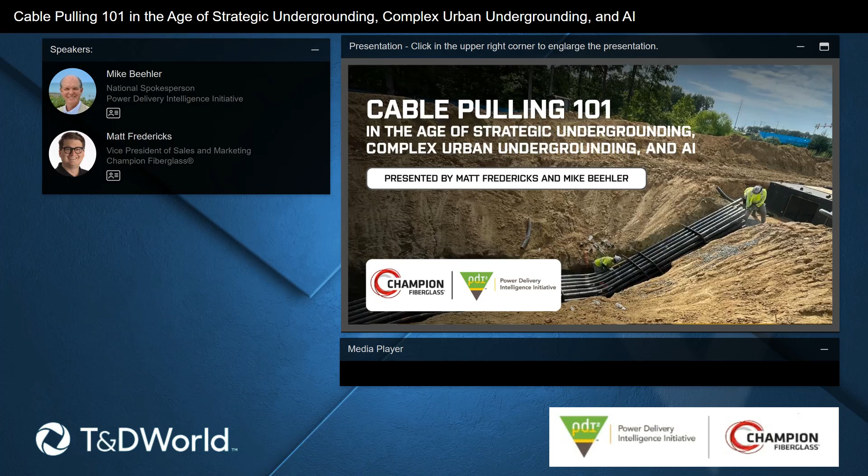So I'll just tell you briefly that the Power Delivery Intelligence Initiative is a group of contractors and consultants and fabricators and cable manufacturers and equipment manufacturers that advocate for underground. We want to be a resource for planners and engineers, and today, even data scientists, to help evaluate the total cost of ownership of overhead versus underground electric distribution and transmission over the life of the asset. So what's it really cost to have an overhead versus an underground system over the life of the asset?

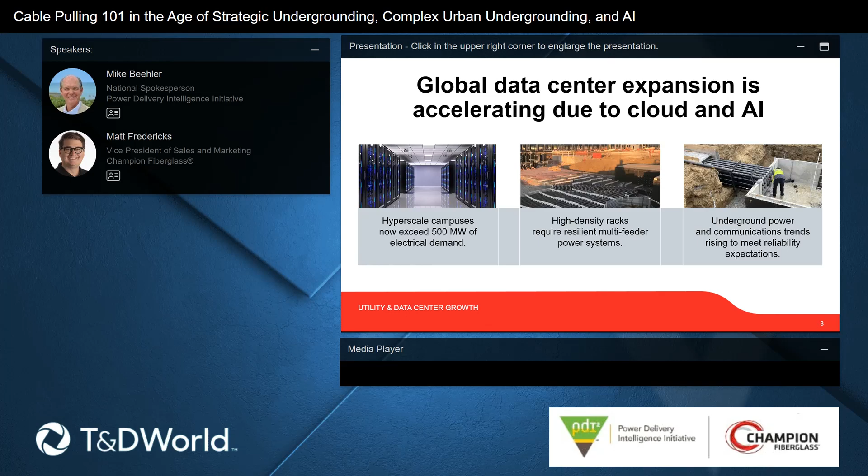It's a fabulous and great tool to use. I use ChatGPT for email drafts, proofreading, multiple different things. One little tidbit that I'll share, just in case most of you don't know this: one ChatGPT search uses as much power as charging your iPhone from 0 to 100%. So the amount of energy that ChatGPT and other AI programs use is very, very immense. So that translates into electrical load growth.

So what does that really mean? Hey Matt, let me ask you a question real quick. Yeah. So I look at these duct banks that you're showing in that previous picture, and they're massive. I mean, what about the heat buildup? I'm going to bet that you're going to talk about heat dissipation with fiberglass, but these are really, really massive duct banks with dozens and dozens of ducts. What's going on? Yeah. Well, this, as you know, Mike, being an electrical engineer, creates a very interesting problem for

the project owners and the engineers, as well as the contractors dealing with these large buildings. So you're dealing with cables that are running really hot because they're trying to get the maximum amount of amperage out of the cable to run these data centers as powerfully as possible. So what does that mean? Well, there's a lot of research going into concrete right now. If the duct banks need to be concrete encased, a lot of folks use what's called red dye concrete, which is highly compact concrete that allows the heat to dissipate faster rather than regular concrete slurry, native soil, sand, other

things of that nature. That concrete is anywhere from 3 to 5 times more expensive a yard than regular slurry. So it makes things a lot more expensive. So folks are looking at different conduit materials as well as a multitude of other products to try and defray that cost. Good, interesting. Thank you.

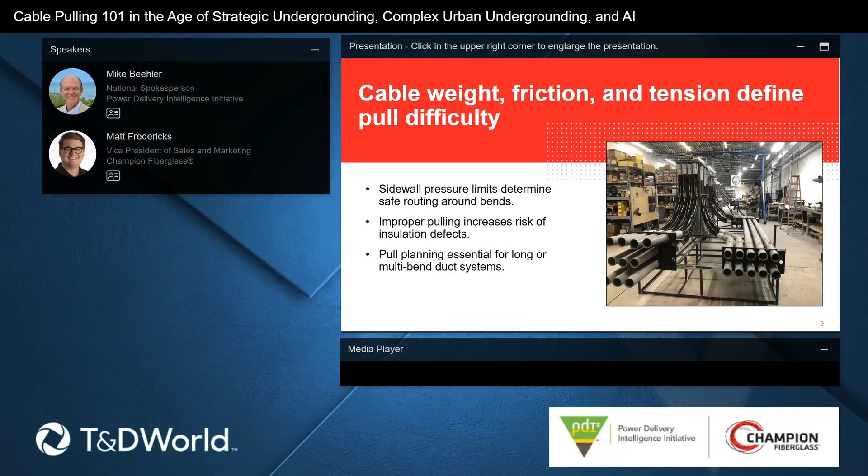I will say, just want to hit this home on this slide. Improper pulling increases risk of insulation defects. A lot of people will talk about, hey, we have this puller that'll pull 12,000 pounds, 15,000 pounds, and the cable made it out the other side. Well, just because a cable made it out the other side doesn't necessarily mean that it wasn't damaged in the process. That's why that pull planning matters so much. So things that we can do to help, and these are just a couple things. It's not comprehensive. This may seem kind of elementary or odd to people that I'm going to talk about a swivel, but Mike, I'm sure you've probably been on many plant audits.

You see how cable is made, and it's in a rifled pattern. Cable, rope, many things like that have a natural lay to them, which means that when they're being pulled, they're rifling out. They have a direction to them, if you will. So the reason why we use swivels is it prevents that rotation from happening when you're pulling it. And that's the same with the rope too. It has a natural lay or rifling to it. So you want to keep it from twisting under load as much as possible. That will vastly reduce the amount of torque on the cable when you're pulling.

So there's tons of different types of swivels. There's sealed ones. There's even ones that you can purchase from our partner at PDi² that have what's called a breakaway swivel, with a pin that will actually break if you exceed a maximum amount of allowable tension. So when that pin breaks and comes out the other side, you'll know it's exceeded that tension. If the pin isn't broken, it hasn't exceeded that maximum tension. So that's more elementary.

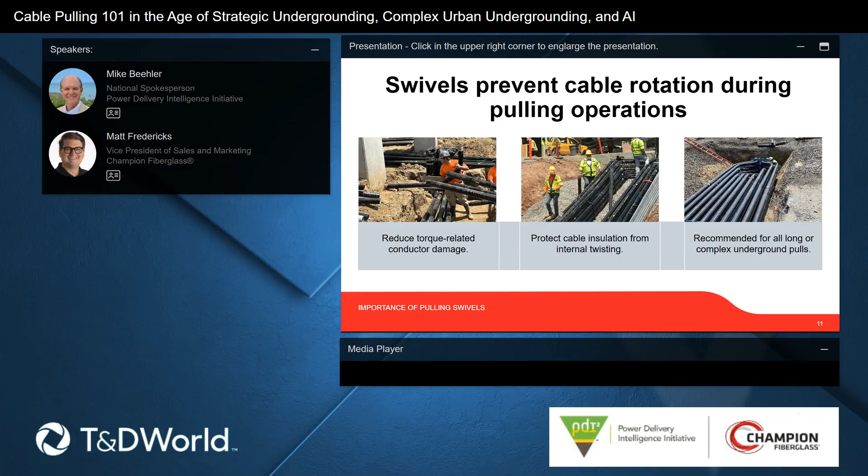So another one that folks might giggle at, but I will tell you it's so important, is pulling rope. People oftentimes balk at a pulling rope that in their mind might be more expensive than another. But getting a high quality pulling rope, or even a high quality braided anti-twist aircraft cable on a diesel underground puller, all of that matters so much, because you don't want that rope to stretch over time. If it's a low stretch rope, it'll keep consistent tension on that cable or conductor. If it's stretching, it might snap or break, or you might have galloping or jamming.

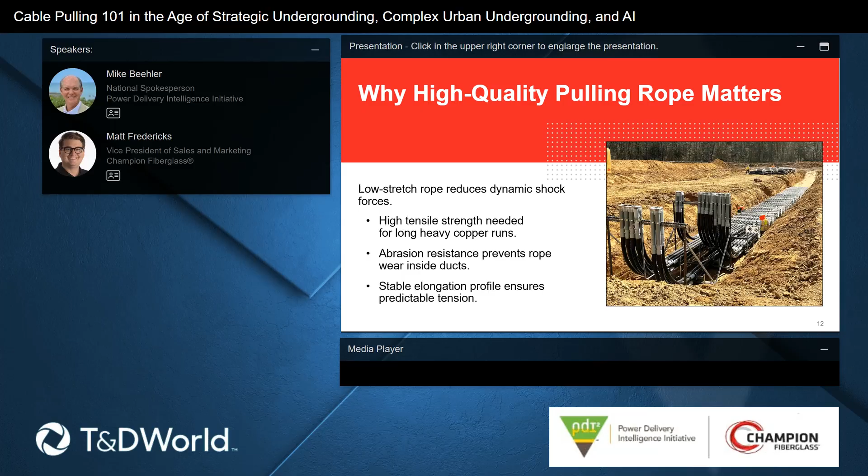And then also you want it to be smooth on the inside of the duct. I talk about this all the time with mandrelling. I've never understood why an engineer would specify a wire brush mandrel. I'd love to hear in the comments why folks still love those wire brush mandrels. I want that conduit to be as smooth as possible on the inside. So having a rope that's nice and slick, and there are tons of manufacturers that make them, is so fabulous to have in your conduit, because it's not going to abrade the inside of the conduit.

All right. Another thing that I love to harp on, and this is really interesting. I was fascinated, Mike. One time, I won't name what cable manufacturer, but there's a lot of utilities that specify a specific brand, and I looked in their manual, and they actually disallow pulling grips at a certain tension, and that's because those grips actually pull on the outside of the cable, on the jacketing, rather than pulling on the conductor. Right. And if you've ever been on a cable pull and the cable comes out the other end after you've used a cable grip and it's under really high tension, sometimes that jacketing and even the insulation will be far ahead of where the conductor starts, which means you've really done a number on the insulation and the jacketing.

So why would you use a pulling eye? Well, if you use a pulling eye, it's pulling on the strongest part of the cable, which is the conductor. There are crimp-on ones. There's reusable power pulling eyes. There's tons of different types of pulling eyes.

And what's awesome is most cable manufacturers will put them on for you at the factory, and critically, they will stagger them, almost like a multiple pulling harness, because you want one conductor after another coming through that sweep in a system, rather than having all of them bunched up and potentially jam inside of that sweep. So that's my mild amount of pontification on why you should use pulling eyes in that instance.

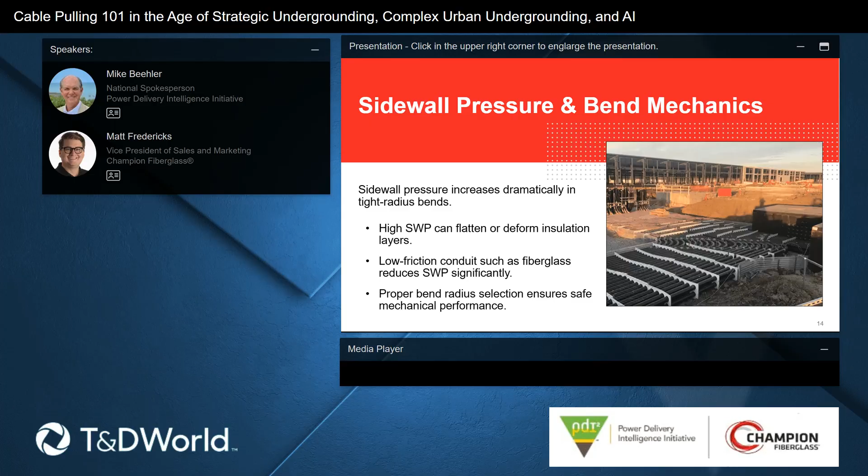We're so lucky now that we're beyond running line tensiometers or amp draw tensiometers on cable pullers. Now we have real-time data every second, pulling cable tensions down to, I believe, tens of pounds that can be recorded. Limits can be set on cable pullers so the pulling tension isn't exceeded. There are so many safeguards now that we have. But again, that's predicated on using the right type of tools.

So, hey, Matt, I'm just glancing at the questions from the audience, and your comment about a wire brush being used for mandreling got some reaction. Oh yeah, I would love to hear about this. Yes. So you've got an alternative to a wire brush that you like to recommend?

Gosh, I would say for cleaning out ducts, even using a slug style mandrel with PVC or HDPE discs, which are a little bit softer, is better than a wire brush mandrel. And a slug like that is really going to take out most of the debris. You can also use a rubber swab or a rubber slug as well.

I remember the first time I was at an underground training school put on by a manufacturer I used to rep, who makes cable pullers, and we saw a wire brush mandrel go through a PVC duct system, and there were just little furls or curls of PVC everywhere. It's like, well, gosh, why would you ever want to use that? It's just eating up the inside of that duct, so use something that's smoother.

There are still utilities, in fact one you used to work for, Mike, that I believe specifies wood mandrels. And to be honest with you, I think a wood mandrel is perfectly fine because it's a softer material. It's just that wire brush that I really wouldn't ever use in a duct system if I didn't have to.

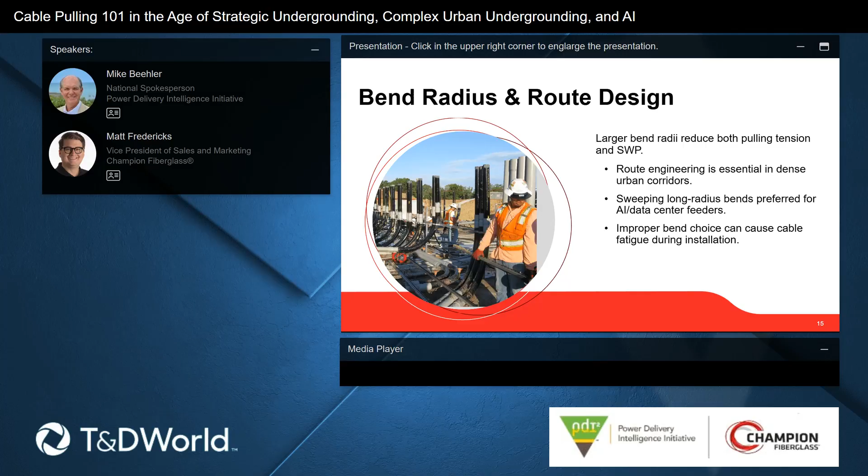All right, so we'll talk a little bit about what fiberglass does for us. So why are utilities, data centers, what have you, using fiberglass right now, and why does this dovetail into cable pulling and complex urban installations? Well, there are a few different things to think about. We've got an extremely low coefficient of friction, which is a part of reducing the overall pulling tension.

If you look at our conduit versus PVC with a PVC jacketed cable, we're almost 70% less coefficient of friction than PVC when pulling dry. Certainly, cable pulling lubricant adds another factor, but it is reduced by a multiplier, so that ratio stays the same. So it's definitely something to think about, especially in those sweeps. A very wise municipal superintendent once told me that pulling through a fiberglass 90 was like pulling through a PVC 45. It just reduces that overall tension so much.

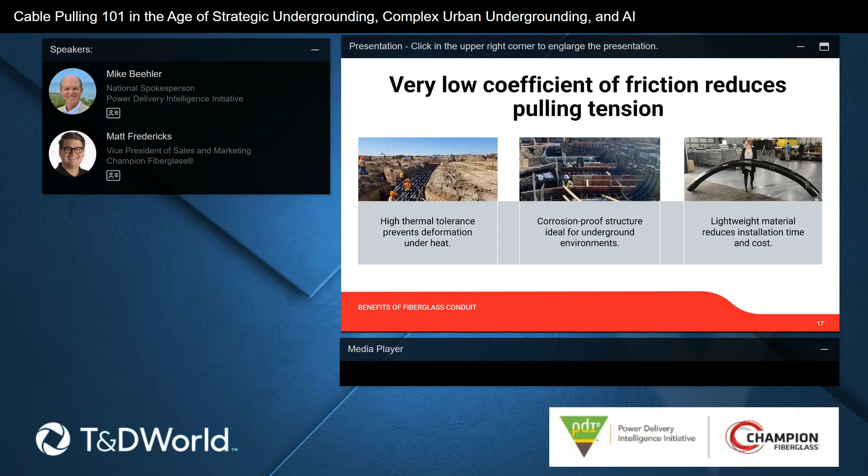So heat dissipation, we get a lot of questions about that right now. As a general rule of thumb, we have lower thermal resistivity than PVC or HDPE. That means the heat dissipates outward very efficiently, which minimizes that buildup from those high current conductors.

A lot of people will say to me, well, you really can only run cables up to 90C, and that's what PVC is rated at, so why are you guys rated up to 110C? It seems like more and more there are folks that are willing to exceed that margin or don't feel comfortable running the cable wide open at 90C. They want to have a safety factor on that. So having something that supports a cooler operation will extend that cable insulation's life over time.

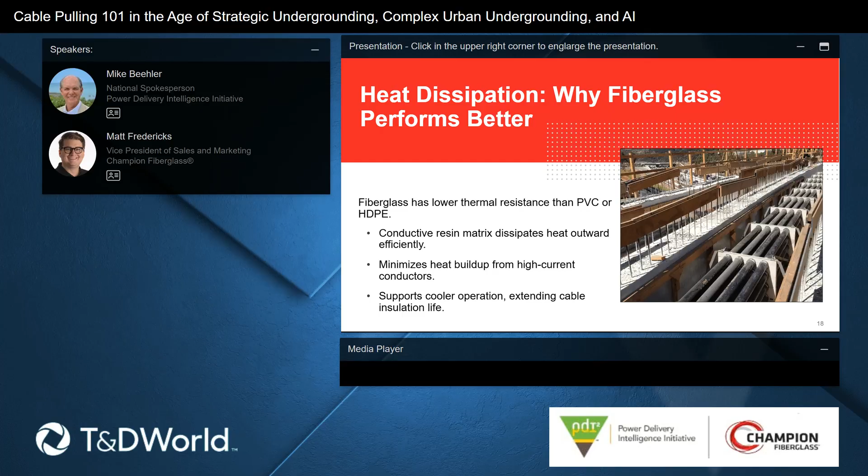There are so many factors, though, that go into that overall thermal performance and the ampacity advantage. We're talking about things like, what's the conduit in? Is it in native soil? Is it in sand, regular slurry, highly compact concrete? All of those things work in conjunction to either help or hinder that cable's lifespan, or the rate of heat dissipation, rather.

It's really no different than thinking about cable pulling. There are so many tools we can use to either help or hinder ourselves with the initial installation, but we also need to think about how that cable is going to perform after that. And like you said, Mike, we really want this cable to perform for 40, 50, even maybe 100 years. So that lower temperature will increase the allowable cable ampacity. We work with numerous utilities right now that love using fiberglass conduit because they are not having to derate their cable as much.

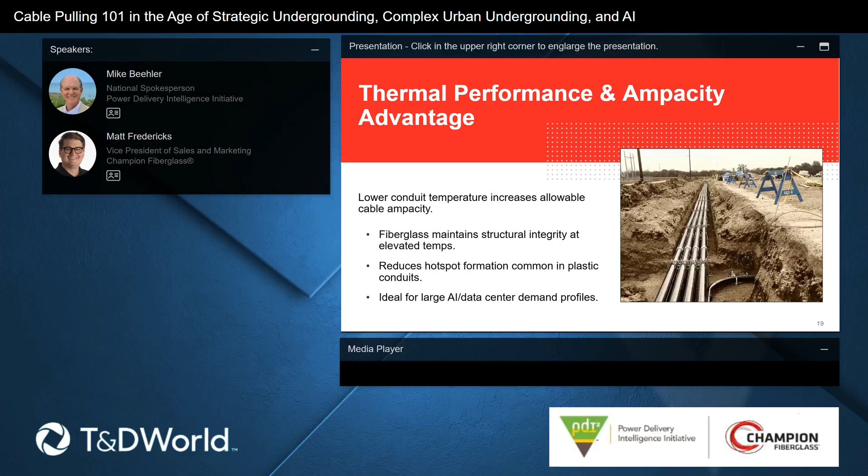Same with the fact that fiberglass inherently has a thinner wall, but has the same OD as all IPS conduit. That allows for a better cable fill rate between the heat calcs and then also the inside diameter of the conduit as well.

So Matt, you mentioned these utilities that you're working with. What specifically do they like to use fiberglass for? Do they use it for the 90-degree turns? Do they use it for under bridge applications? Or are they even going as far as saying, you know what, we're just going to use it in every application that we've got? Or maybe, let's say, on a critical infrastructure for a critical customer?

Yeah. So traditionally, and you know this from your background, Mike, we started with bridges early on. And then once people discovered that our 90s don't burn through when being pulled through, folks started specifying those because they thought, well, I can use a fiberglass 90 that doesn't need to be taped, cold galved, all that jazz. It weighs a tenth of the weight of steel and it's a third of the price. And it has a coefficient of friction that I believe is about 40 to 50% less than steel. Why wouldn't I use that?

Well, now a lot of people have latched onto the fact that we have a system that they can use below grade, whether it be concrete encased or direct buried, that you don't need to use adhesive with. And we're less than a third of the weight of PVC. We've got that same low coefficient of friction, so we have a lot of utilities now that are solely specifying fiberglass for their straight runs as well.

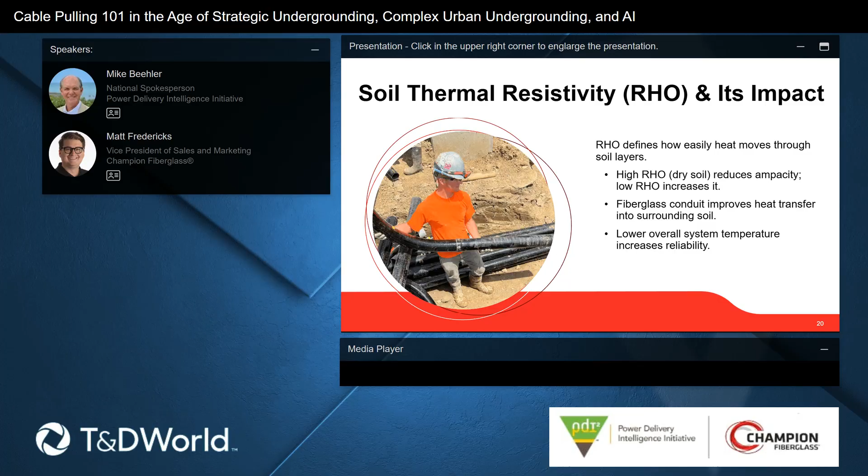So I won't belabor this slide more than it needs to be. Mike, you're probably familiar with CYME or the other calculators, right, that do heat modeling. I think there's probably multiple different ones that do it for electrical engineers. This is, again, where I'd say, hey, look at what the RHO value is, whether it be soil, concrete, whatnot. Then you combine that with your cable and your conduit, and really figure out what makes sense for you.

So we'll nerd out for a tiny bit as far as how this relates to duct bank modeling. The long and the short of it is you really need to understand that fiberglass reduces that temperature rise compared to our other composite or plastic friends. We're really only using PVC, HDPE, or fiberglass in those duct banks. So you can use a glueless system like fiberglass, and then after the fact, rest easy that our conduit will actually dissipate heat faster than those two.

I don't want to give an exact factor because, of course, there's probably a million different soil types or concrete types being used. But when you talk to folks who are doing hyperscale data centers right now, they're telling us that they're able to use concrete slurry over red dye concrete. And if that's reducing the concrete spend by anywhere from 60 to 80%, that's a huge, huge savings.

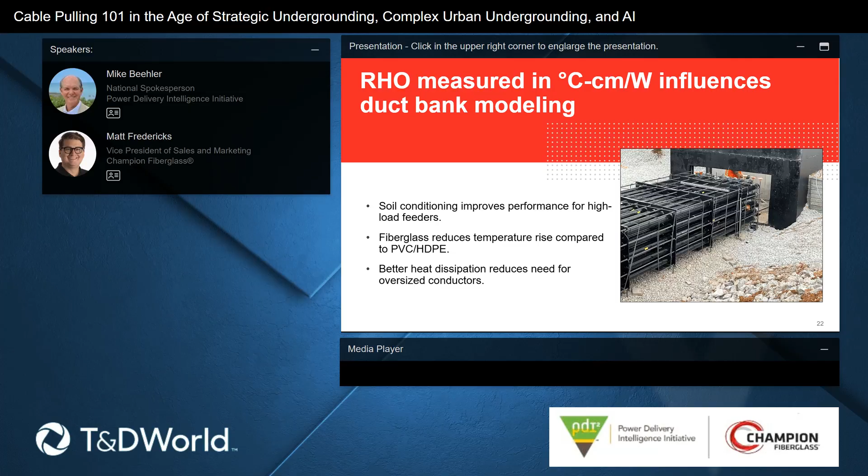So things that we can do as far as best practices go. Pre-inspect your ducts like we were talking about. Definitely want to mandrel those, blow a mouse through, make sure they're clean. It's pretty simple. A lot more people, folks like yourself, Mike, are requiring that the ducts are scoped ahead of time. Is that necessary? I guess it would be up to the engineer, but at a minimum, they should be mandreled with a test mandrel to make sure that they're not out of round or nothing goofy has happened.

We talked about monitoring the tension continuously. Again, there's so many different cable pullers out there on the market right now. Some are more advanced than others, and there are certain entities in this country that require real-time monitoring and require that to be given to them after the cable pull is done. I would recommend that anybody who's getting serious about cable pulling or heavy cable installation for utilities or data centers, it's probably time for you to either lease or buy or look into getting a more advanced cable puller that has those capabilities, because I think that requirement is going to be a lot more prevalent as time goes on.

And then finally, use a compatible cable lubricant with that cable to minimize the friction, whether it be in fiberglass, PVC, steel, whatnot. That $70 or $80 pail of lubricant is such cheap insurance to make sure that your cable doesn't get damaged. There's plenty of different types now, and a lot of it is no longer messy or gloppy. You can either pour it in, spray it on. They've got bags that you can attach to the line as they pull it in. So it's very, very easy to use. So we'll do... oh, go ahead.

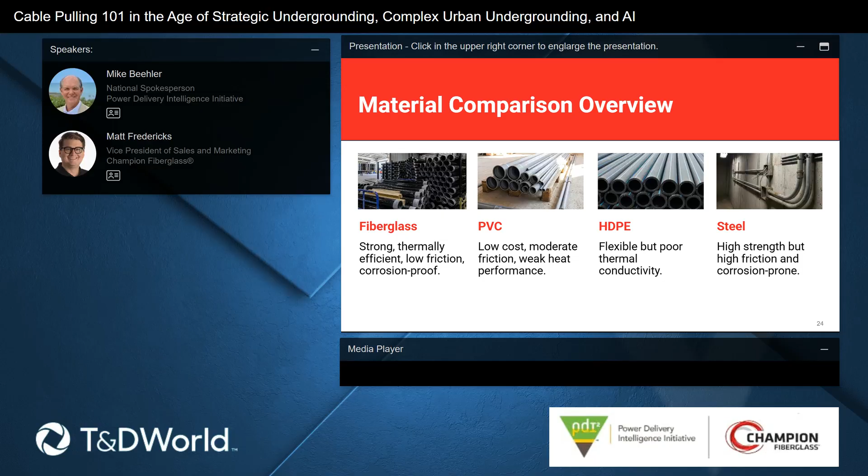But really, 99% of what folks are using on the market have the same OD as PVC or steel, but that ID is going to be larger. Our standard wall is 7/100 of an inch thick. I want to say Schedule 40 is probably 1/4 of an inch thick. So ratio-wise, you're going to get a little more space in it, and looking at the cable fill charts, it'll be a noticeable increase as far as what you can fit into our conduit.

So what do we need in the future? This is something that we spend a lot of time talking about at PDi². We need more underground feeders. We need a lot more power. We also need to be thinking about how we're designing those duct banks to accommodate a lot more cabling, having utilities all communicate together on joint trenching, water, power, gas, sewer, all of those things commingling together. So it's really important that the utilities continue to work together, and hopefully joint trenching will continue to increase in popularity. Thermal management.

I love that idea. Have you seen that idea implemented? I know overseas in Sweden and France and some other countries in Western Europe, they do the joint trenching. But are you aware of anybody here domestically, Colorado Springs or others? Yep, exactly, Mike. There's a few municipalities and some others that are either doing it or actively looking into it.

But it's 2025 now. I would say that within the next decade it's going to be far more prevalent because, again, everybody's using more resources, and it makes sense to have them clumped together, especially when really everything's going underground. So having those folks communicate, map, and be aware of what's underground together is so important.

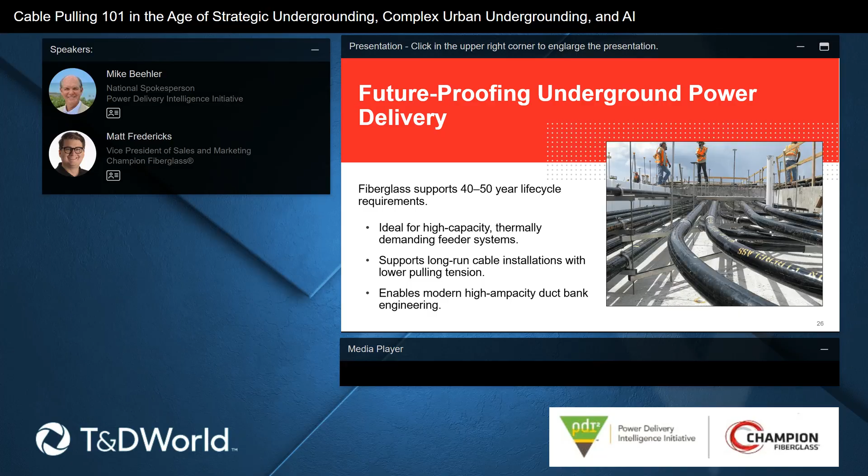And remember, this isn't going away. So, let's continue to think creatively about planning, materials, and then, really where we're putting that infrastructure after the fact. Hint, hint, it should be underground, so we can prevent damage.

So with that, what can we answer for everybody? Well, we've got some great questions in here, and we've answered, actually, Matt, a few of them as we've gone along, but here's some other questions. Looking at this one here. Okay, well, here's an interesting question. How many fiberglass conduit producers are there now in the market? That's a little unfair question, but I'm going to ask it anyway.

No, that's fine. There are 3, including us. So there's us and then 2 others.